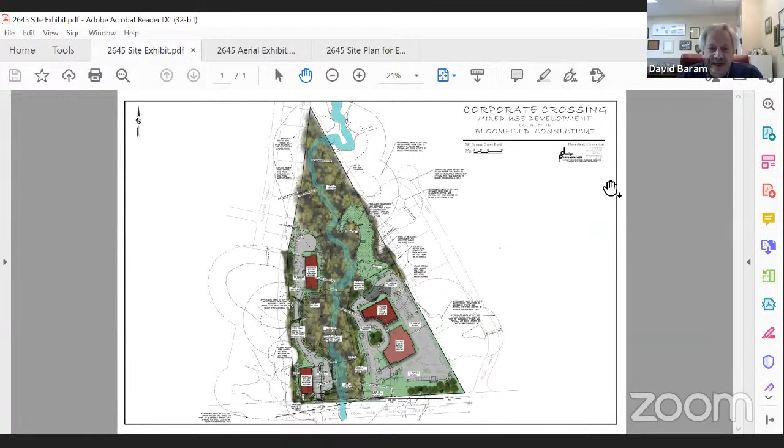One of those changes that I want to mention from the beginning is on page 13 of Peter's memorandum. Actually, page 12, he mentioned the idea of a conservation easement. And we were not sure at the last hearing whether we could accomplish that because there are some challenges, inasmuch as there's an MDC easement that traverses the property, and there may be another easement as well. But we went back and we took another look, and we are now confident that we can provide a conservation easement to encompass Filley Brook and the undeveloped portion of the parcel.

And we believe that will be about 8 acres, less any area that is comprised of the MDC easement or any other easements that we find, unless we can convince those parties to become part of the conservation easement. But should the commission approve this application this evening, we consent to a condition being a conservation easement, and I would hope that you would afford us some flexibility to work with staff to identify the boundaries of that easement and the language that is suitable to your staff. So we feel that will further enhance and protect, again, the undeveloped areas and the habitat and wetlands that traverse this site.

This is an exciting project for us and for those in staff and other groups that have viewed it. But as pertains to your commission, we believe that we have complied with your regulations and that we have adopted the most feasible and prudent assurances on this site so that we protect the wetlands, we protect the watercourse, and we protect the habitat. And in fact, when I address you at the end of the presentation to talk about the criteria for approval, we will emphasize again that our mitigation efforts are extraordinary and actually surpass the existing wetlands areas that are being impacted.

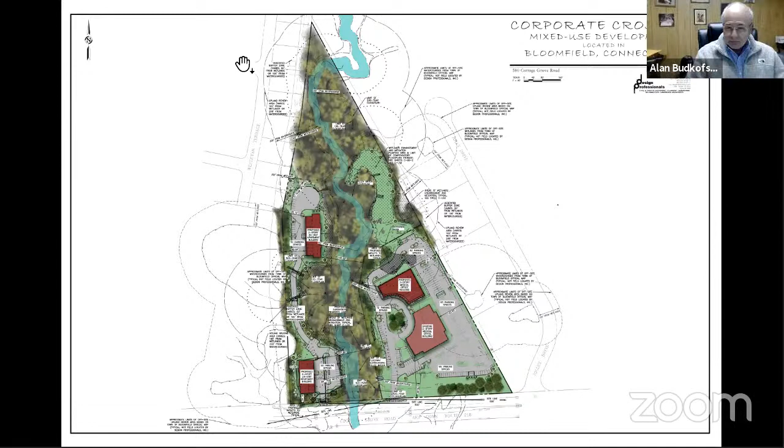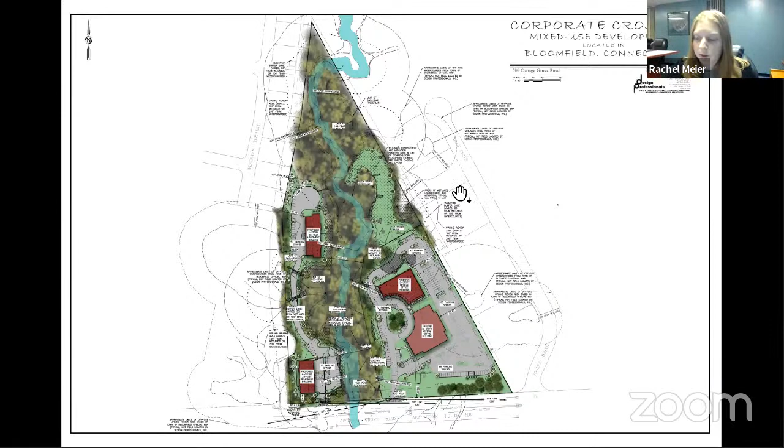Thank you, David. Good evening, Commission. Is everyone able to hear me well? Yep. Okay, great. So as David said, I just want to reiterate, my name is Rachel Meier, Senior Landscape Designer with Design Professionals. I wanted to provide a brief summary of the plan and letters that you received, as Peter Castaldi mentioned, since we last met in January, to accommodate the questions and concerns that we heard from you all. So what you see on the screen is our visual exhibit that we provided to orient you all again. But I will switch to a specific plan to highlight the areas where we have made changes.

So as a general overview, we have reduced 2,645 square feet of direct wetland impact, from over 16,600 square feet before to 13,980 square feet. That is a 15.9% reduction in the direct wetlands impacts. And that also provides related reductions to the upland review area disturbance and vegetated buffer disturbance. So these overall plans that you're looking at, on the left-hand side is the plan sheet that you saw back in January. And the right-hand side is what you should have received in February on our C-SP1 sheets, our overall site plans. So the right-hand side is what pertains directly to the revisions made since January.

So our main goal for the revision, as David mentioned, is to further reduce the effect of the development on the existing habitats on site, as well as Filley Brook itself. One area of concern last month was the residential portion of the site as it affects the wetlands, particularly the southern parking lot. Hopefully you can see my cursor highlighting the red clouded area on this part of the site.

So we removed 15 parking spaces, the entire row of parking spaces on the eastern side of that parking lot. This provided for an additional 18 feet of distance between the retaining wall that is required for grading purposes and Filley Brook itself. This change eliminated 1,292 square feet of direct wetlands impact. So you can see on the old plans, we were encroaching quite a bit and were able to completely remove this disturbance.

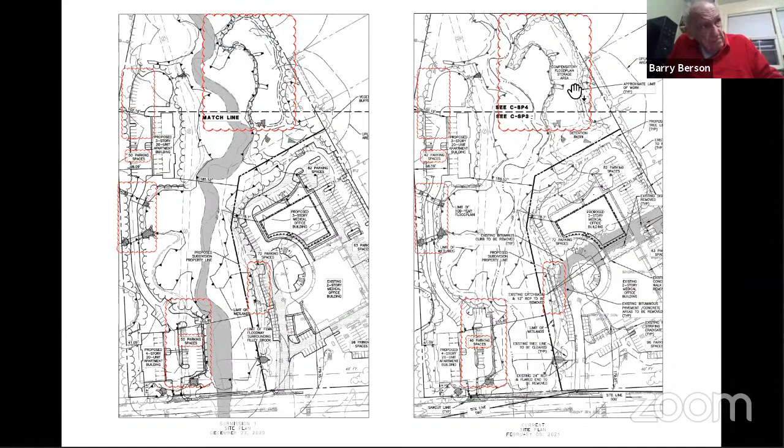So where you can see these two small pockets of wetlands, we were able to reduce the wetlands impacts in those areas, not completely eliminate it, to ensure that we still had proper water movement in the floodplain storage area. But those collective sites have reduced our wetlands impact, like I said, almost 16%.

So we would also like to acknowledge a note in Peter Castaldi's memo that we need to revise the grading in our floodplain compensatory storage area. So again, outlining this red clouded area in the northeast corner of the site to ensure that we do not have any 3-to-1 slopes in the side yard setback. We are happy to accommodate that as, again, a condition of approval working with town staff. We will provide revised grading plans to ensure that no steep slopes are impacting the side yard setbacks in this area.

As David mentioned, the applicant is absolutely willing to accommodate the conservation easement to run through the site. As mentioned, we have the sanitary sewer trunk line easement that runs through this site, but there is still a very significant amount of mature woodland that can be protected and preserved. There is another conservation easement to a property east of this that it will join with and provide a lot more continuity for habitat in the neighborhood overall.

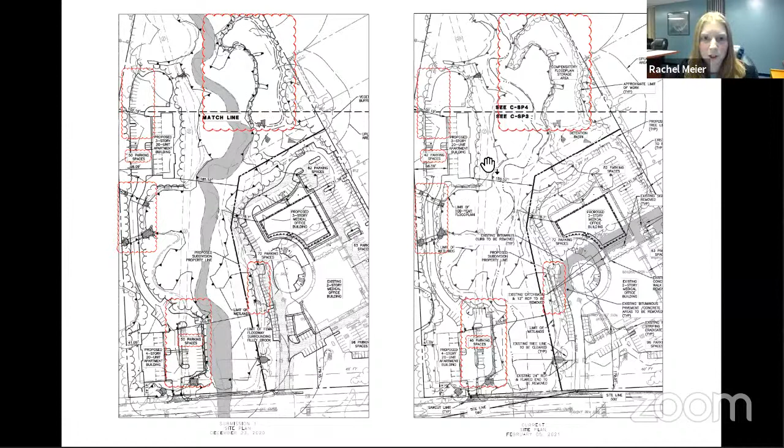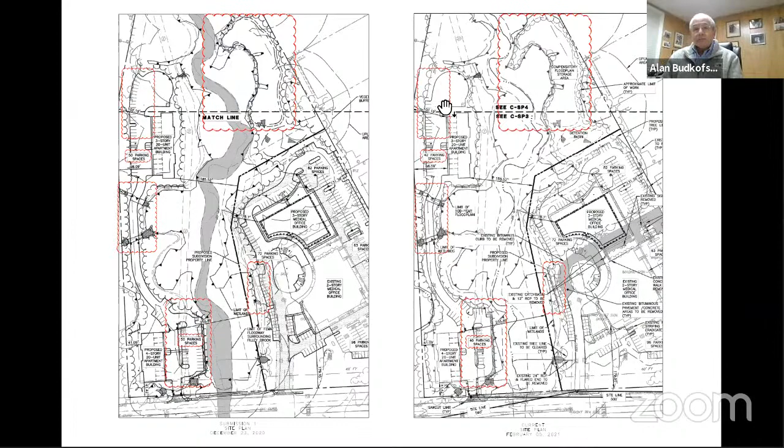Chairman, what I would like to do is talk about the criteria for considerations and just review with you some of the things that were done to look at feasible and prudent alternatives.

The first thing that I think you should recognize is that the new office building that we're proposing was actually approved in 1989, as indicated in Peter's memorandum. But the building that we're putting in now is much smaller in footprint and much less of an impact. And that was designed intentionally to avoid as much interruption and impact to the wetlands. So we did carefully plan that.

And I should say, as I mentioned last time, for 2 years, Peter Damali and myself and other members of the team have worked closely with your staff, and the various iterations of this plan have evolved dramatically so that we tried to design and place the improvements to the site in the less harmful areas and as suggested by your staff. But this office building is a great reduction from what we had before.

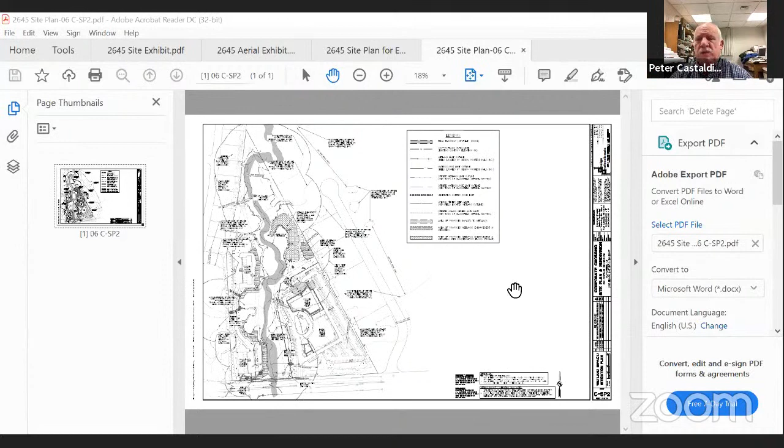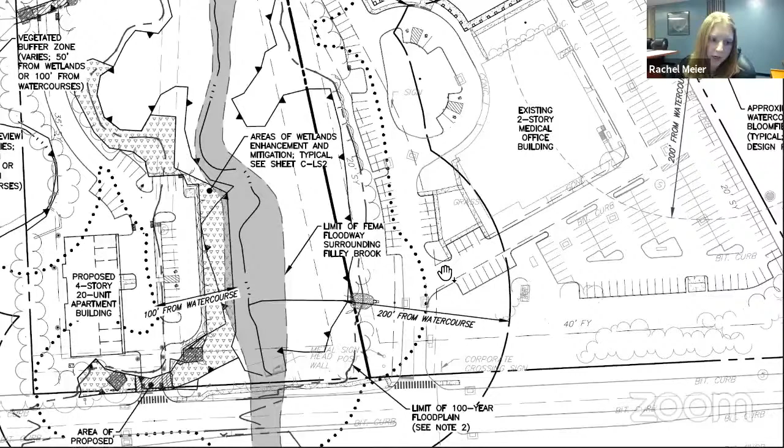Is that sheet SP2, CSP2? Correct. Okay. Can you make it a little larger, please? Absolutely. So I will zoom in close and start from the southern portion of the site and move northward, just to orient everybody where the existing medical office building is, on the southeastern corner over here. So you will see a diagonal dashed line is where we have direct wetlands impacts.

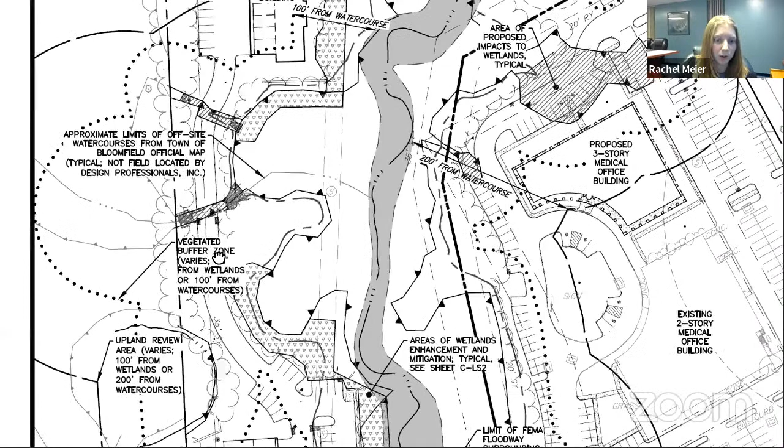So starting in the residential development on the western side, for those that were not here, 2 20-unit apartment buildings. We have 3 small pockets, 1, 2, and 3, particularly for pipe crossings to ensure that water moving from the west of the site is properly crossing underneath our new driveway entrance and entering the wetlands through some water quality units. Sticking to the residential side, just to provide some clarity, moving north through our entrance drive that accesses both of the apartment buildings. We have some more wetlands disturbance here.

Our wetlands agent has described these 2 areas as eroded ditches over time that water has continued to flow through. So we are channelizing those underneath our access drive. Again, these will have water quality units and will be improving the quality of the water that is moving from west to east, as it will contain a lot more of the sedimentation that was coming in from the farmland before.

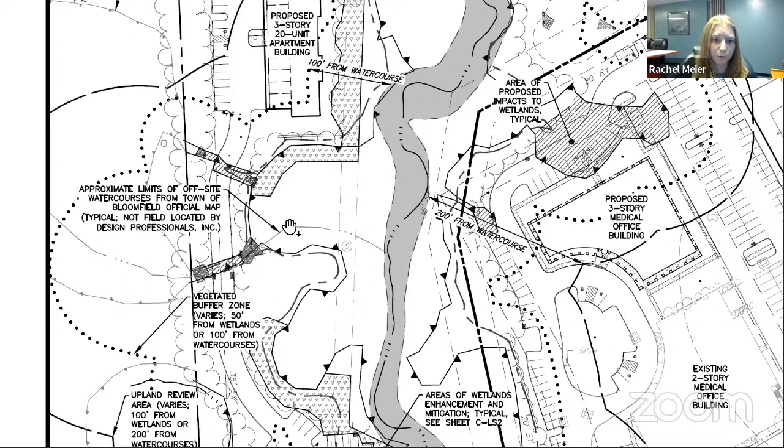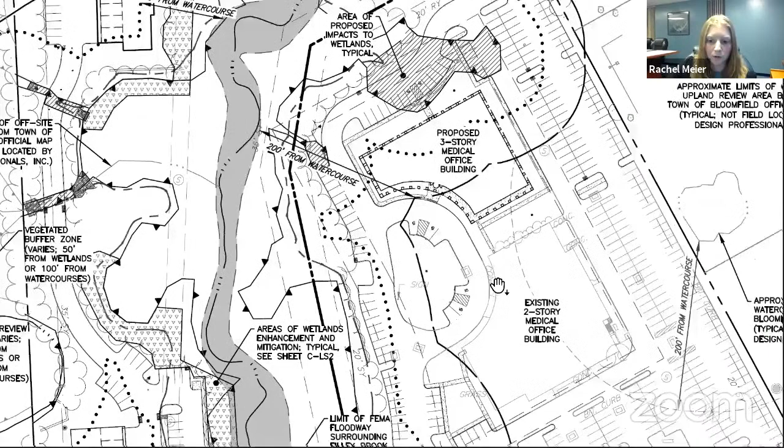So that is it for the residential side. Again, where we were discussing earlier, we used to have some in the north, but we no longer do. So we will move back over to the office side of the development, which is east of Filley Brook.

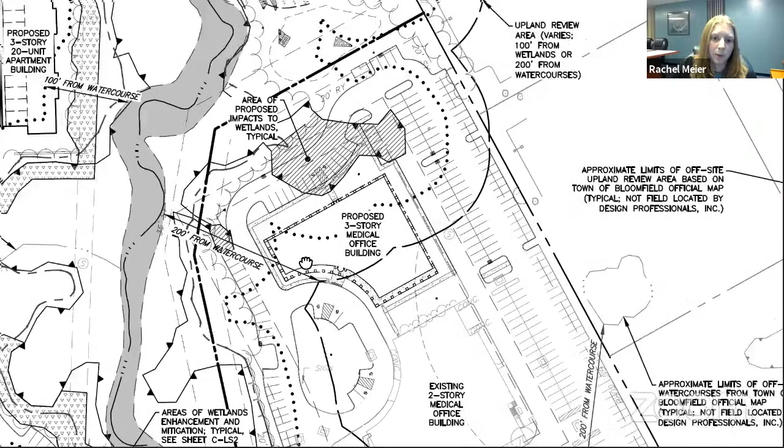So the largest portion of wetlands impacts on this site is this large pocket here. It's a little over 9,000 square feet of disturbance, which is the majority of the proposed disturbance now, the almost 14,000. So it's over half. There is a small impact here due to parking and grading. And then, as mentioned, there is some disturbance to the small wetland fingers that peak our floodplain compensatory storage and wetland mitigation area. There is a large pocket to the east here that we have completely protected.

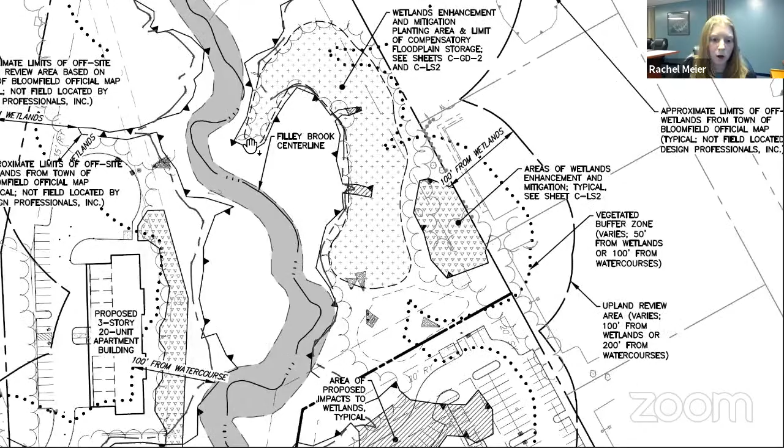And to note, all of the areas on this plan, which is again sheet C-SP2, these triangles are wetlands enhancement areas that run all along our limit of disturbance along the wetlands to provide invasive clearing and more native vegetation plantings.

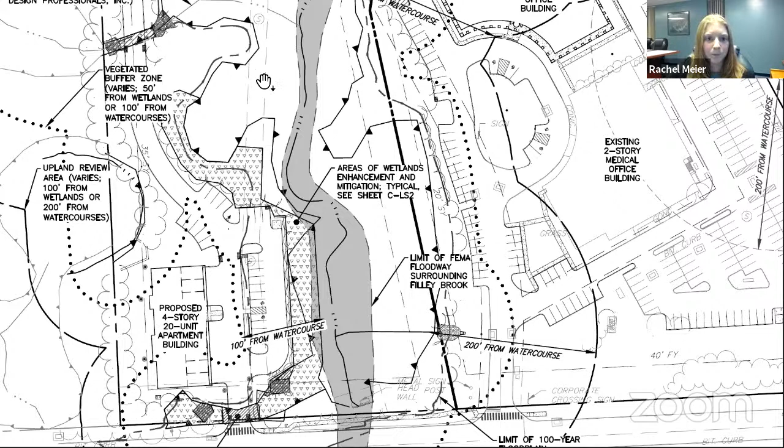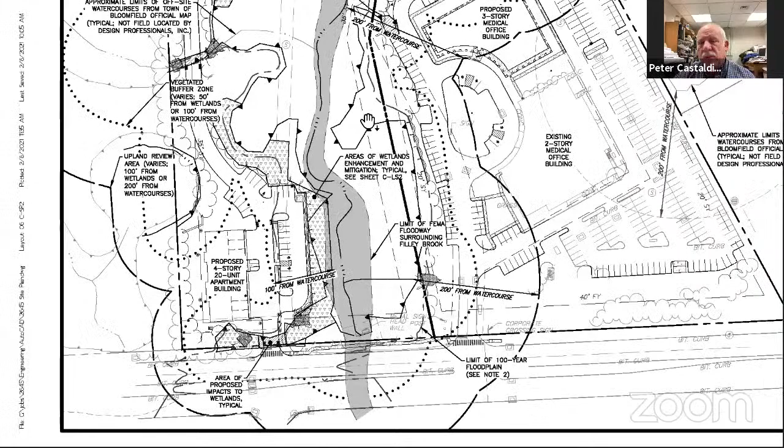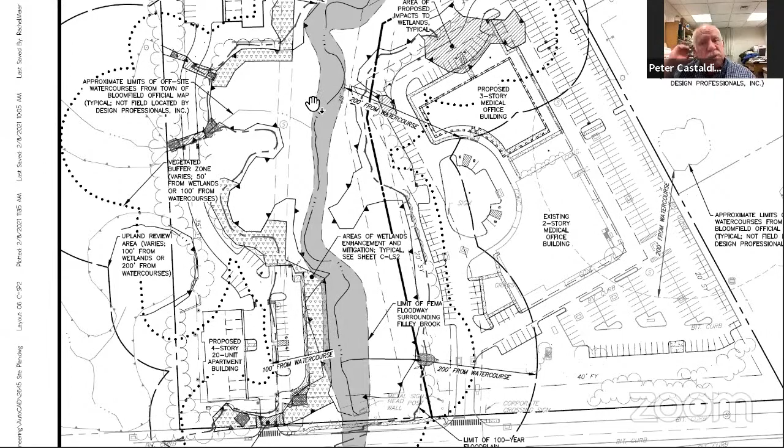Yeah, I would add that the flow in the water course is from north to south. And the big shaded area on the plan is the floodway, not the FEMA flood zone, but that's the floodway. And because there's some impacts to the floodway and the flood zone, they have to do this flood compensation area. And except for the two little fingers, as you mentioned, this area is going to be in the upland review area. It's not a wetland impact, but it's an upland review area impact.

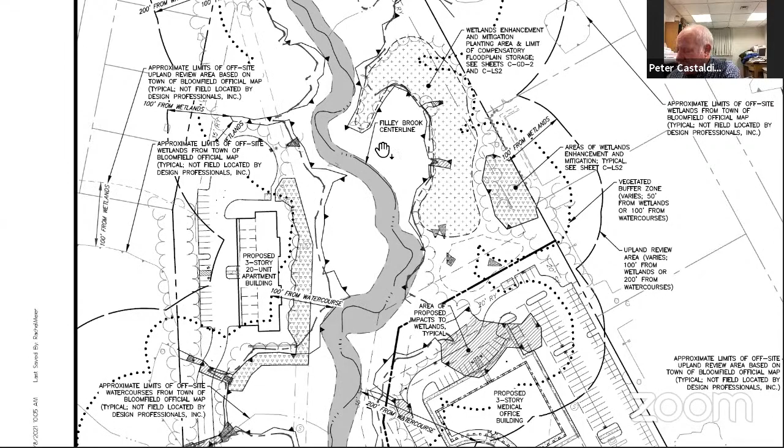Okay, I just wanted to make sure that everybody was clear as to what the actual impacts are. And I think that the applicant has done a pretty good job of addressing the requirements of the regulations, as well as addressing most of the questions that were brought up by the commission and by my staff report. I did see that there was an offer for a conservation easement, which I think is a good idea.

There is an existing one on part of Filley Brook to the northeast, and property to the northeast, and if that's something that the commission would consider accepting, they can accept the conservation easement or request a conservation restriction, which is a little bit different than an easement. But typically, if we do accept a conservation easement, we ask that the easement corners be marked in the field and that there be some kind of warning you're walking into a conservation easement sign or signs erected.

I think the language in that standard comment would be every 100 to 200 feet or every 200 to 300 feet and at likely points of entrance. So I think the conservation easement is a good idea. And I would recommend that the commission add a condition of approval that outlines the requirements for marking the thing in the field, both with corner pins and warning signs.

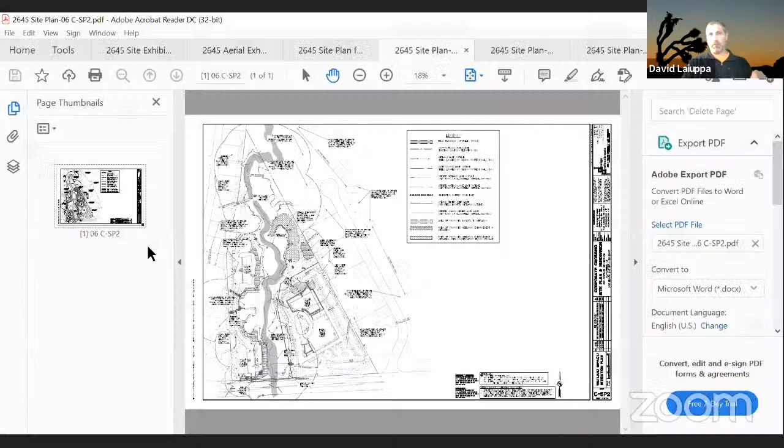No problem. Yeah, what I was going to say is that there are some along the easterly part of the property, but those regulated activities within 500 feet are also within 200 feet of the brook on the other side. Right, but the 500-foot habitat zone is a regulated resource as opposed to our upland review area, which is viewed in a different way, I guess, that it's an upland review area versus an actual resource. So my thought is that if there's activities within the regulated resource, then that should be figured into the impact calculations.

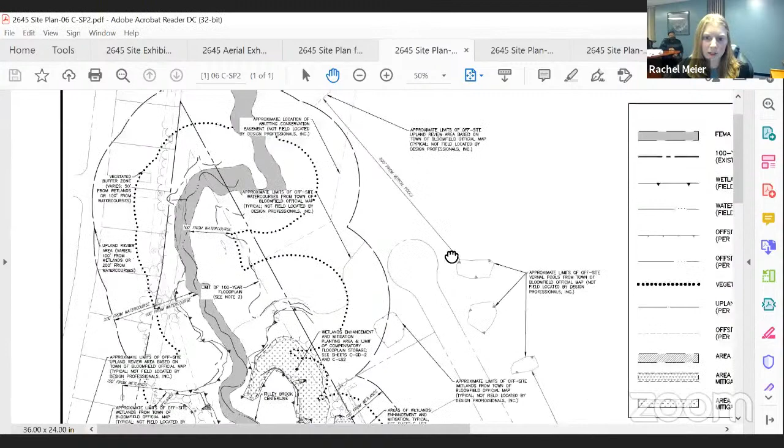So we can clarify. So these are the vernal pools to the east of Jolly Drive. There are 3. There is an additional one that is further north of the site that does not reach our impacted area. I believe the 500-foot offset would reach into this portion. However, as we stated, this area here is our floodplain compensatory storage area. From the property line to the west is all sloping down. We have graded everything to capture any stormwater that falls on our site, and our professional engineer is here as well. He can definitely go into that in a bit more detail, but all of the impacts in this area will not leave our site towards the vernal pools on the eastern side.

Right, well, you're just talking about site drainage, though. The 500-foot habitat area is identified as a critical habitat. So there's potential that there are nesting and feeding areas within that 500-foot buffer. So I guess my point is that ground disturbing activities within that zone is an impact to the regulated resource. So the vernal pool itself is just the envelope. The 500-foot area around the vernal pool is the habitat area, which is covered under our wetland regulations.

Understood. And maybe I can clarify a little bit better. I apologize if I was not clear off the forefront. This area will also act as our wetlands mitigation. So any of the vegetation removal required to construct the compensatory storage will be replanted with native water-friendly species. This is I believe over 20,000 square feet of area, and will be included in that conservation easement area as Peter's memo requires or defines, to include the mitigation and enhancement areas. So that will be able to re-enter a native vegetative state over time. So any temporary impacts by clearing the vegetation will be rewilded over time and return to, as we've said, an enhanced native environment compared to the vegetation that exists there now.

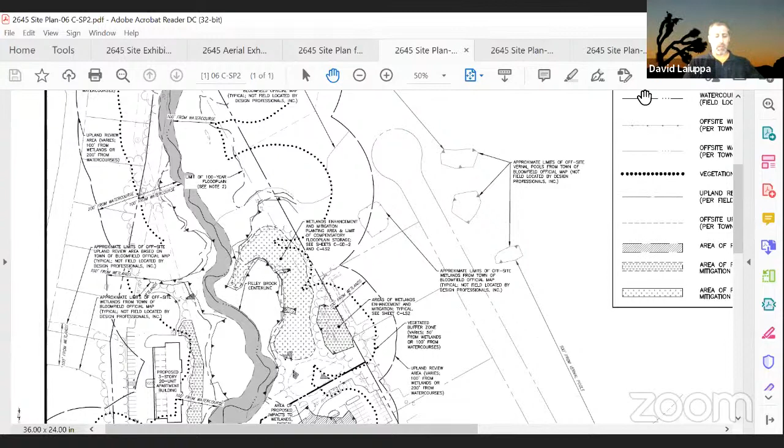Peter, in a previous application, I thought we had a vernal pool that was identified also just north of Cottage Grove Road. That was a very recent application. It's not shown on the map though. It's just on the north side of Cottage Grove Road, next to the adjacent property.

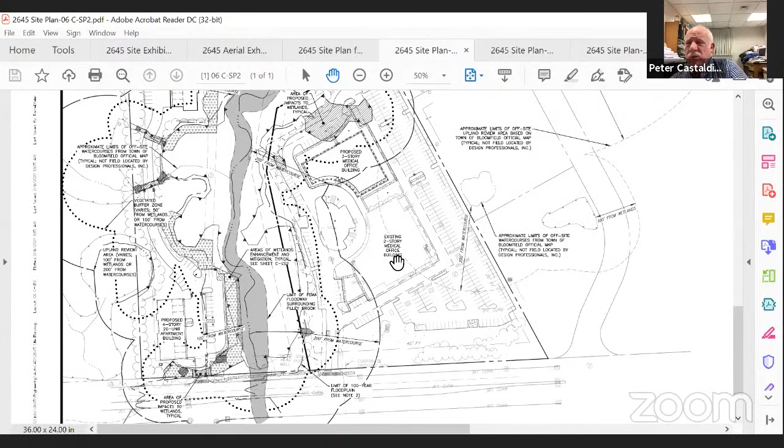Just keep scrolling down. So if you move the hand down to the right, all the way to the right. Yeah, right down and to the left a little bit. Just a little more, right there. Didn't we recently have an application for that existing building to do some work, and I thought there was a vernal pool that had been identified there. I think it's on the other side of the road from where the hand was at 10 Jolly Drive.

No, I think he's meaning even further to the east. That was last year or maybe the year before. Oh, yes. Sorry. Yeah, and that work is already done, right? Yeah, you're right. That was right next to the railroad tracks. Yep. Okay, so that was further east. So that would be probably pretty far, on the north side of the road and west of the tracks. Right there, yeah.

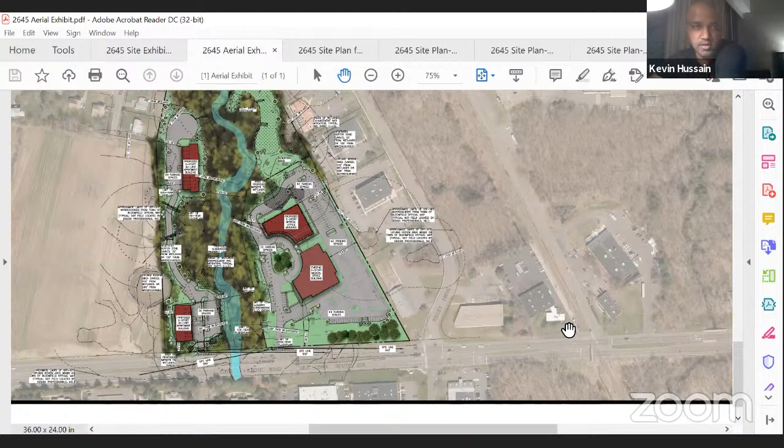In the meantime, as we're bringing in Mr. McCann, Rachel mentioned only a compensatory area, but based on David's question, that 500 offset would even pass that compensatory area into the paved parking area too. David, would that be a concern for you too, not only the area they've highlighted but including the paved area, correct? Right, and I don't know exactly where the radius is, but any ground disturbing activity within that 500 foot, whether it's to make it more natural or to make it paved, is an impact to the habitat area.

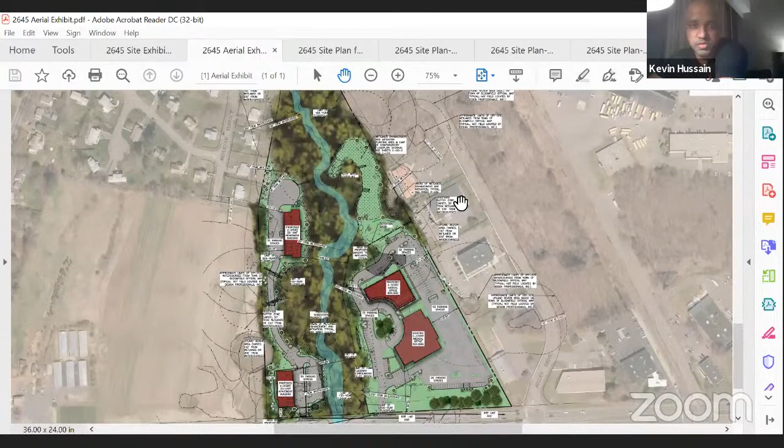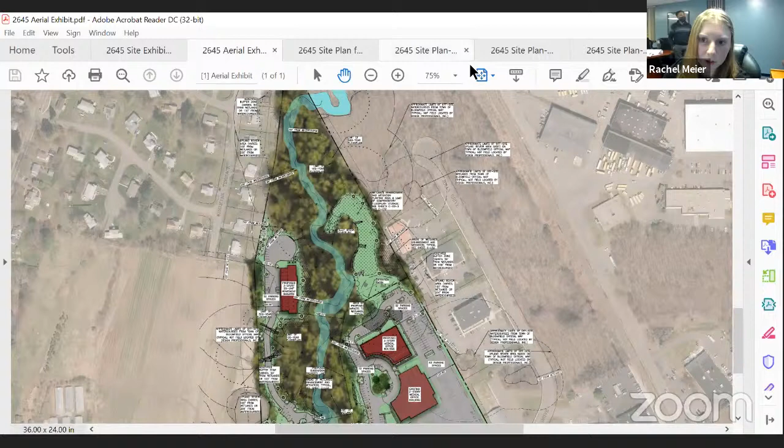What is that radius you have right now there, Rachel, if you just zoom in right here? So I will clarify. Sorry, hold on, Peter. This old exhibit does not include these vernal pools. So let me get you back to this plan, I think it shows it a little bit better. So what we have provided is 100 feet from the wetlands and 200 feet from the water courses for the upland review area. That includes all of the site located wetlands and water courses. This small dashed line is the 500-foot buffer for off-site vernal pools. So those three over here, which will collectively hit our property line. We did not incorporate them into ours.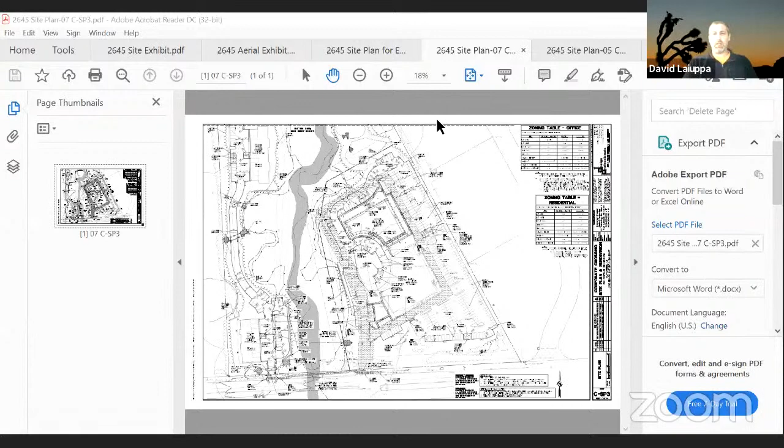I don't think we're seeing what you're pointing at. Right. So once we created the 500-foot offset from the vernal pools, it was incorporated into all of the other upland review area limits. Can you put it back to the plans? We can't see what you're talking about. At least I can't. I'm sorry. Did this jump screens? I apologize. Yeah, we're seeing the site plan. How's that? That's better. Thank you. Sorry, that was a little technical glitch.

So I'll just rewind. This light dashed line is the offsite wetlands and vernal pools boundary. That's the upland review area from those. So they were incorporated together. We worked with Peter Castaldi to show that correctly by incorporating them. So it's hard to tell exactly where the 500-foot is by itself, but you can see that there are upland review areas from offsite features that reach pretty far into even where the existing site is now.

No, but what I'm saying, if you look at your 100-foot offset, it's probably just about 125% of the width of Jolly Drive, right? I'm just approximating right now. And if you do that with the vernal pools, it will be within the 500 feet, but not within the 100-foot, David, right? You're concerned of anything within 500.

Right, because like I said earlier, the 500-foot area around a vernal pool is not the same as an upland review area. The upland review area itself is not a regulated resource. It's a review area around a regulated resource. But the 500-foot area around a vernal pool is a regulated resource. So if you equate it to a wetland, the 500 feet around the vernal pool would be like your wetland boundary, basically. So it's not just the pocket of the wetland, it's the habitat area around it, as defined in our wetland regulations.

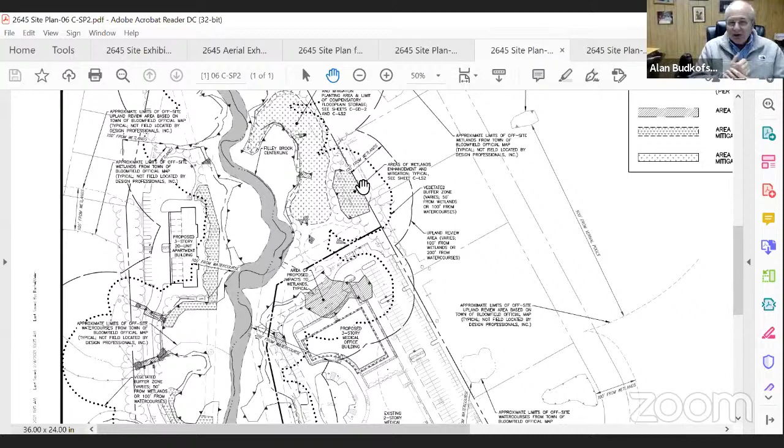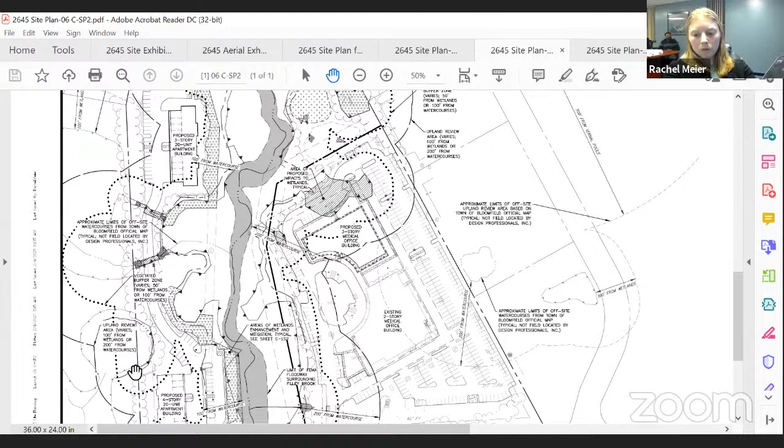Okay, so the Filley Brook riparian zone has 4 principal functions, essentially groundwater recharge discharge. The floodplain itself had the sediment toxin retention, nutrient removal, and then we had obviously wildlife habitat. Wetland 2 was the off-site pond. Hang on a second. Dropped it. Yeah, it's the man-made pond, which we only hit the very eastern edge of, and most of the pond is off-site. And we're not doing anything to that forested buffered side of the pond.

And then the last one is what I call wetland 3 in my report, the disturbed little isolated pocket up by the eastern property line that we're going to enhance and make a lot better than what it is now, which had fill piles and invasive species and all kinds of other nonsense. Okay. I just had one more question and I'll pass it on. Principal function, which was the recharge discharge. And there were a few functions that were there, but not principal, with wetland 2 with the pond. And then wetland 3 really didn't have anything at all.

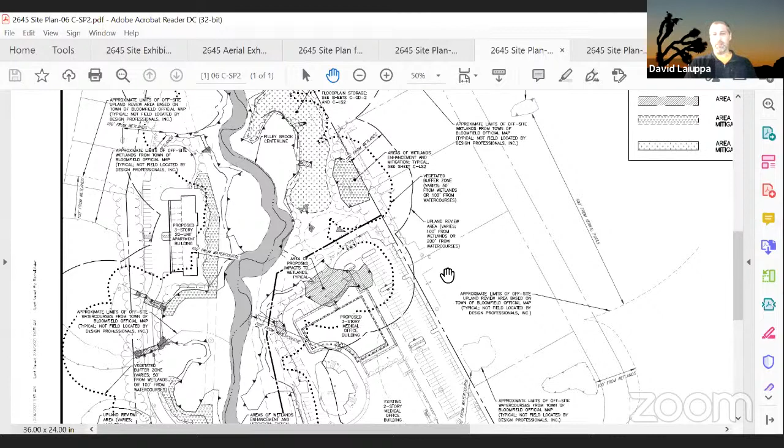Okay. All right. So my last question had to do with the vegetative buffers. I know trees are going to be taken down. Obviously, these are more mature than what will be replaced. Can someone talk in a little more detail about the impacts to the existing vegetation and the proposed replacement for those impacts? I'm still sort of harping on this being a riparian corridor and the loss of functionality, for lack of better words, of the mature to semi-mature forest versus newly planted vegetation.

Well, I'll take some of that and I'll let Rachel take over if she needs to. In my report the other day, if you recall, I talked a little bit about why I got back into the aerial photos back to the 30s, and then I actually have a couple of figures showing the site in the 1970s and then again in 1990, showing the site either deforested or the majority of it deforested, and actually the whole area to the east and to the west was deforested as well. And then we have a sewer line, which I'm sure at the time it went in, they deforested it. Oh, there we go.

So this site has been disturbed or deforested on more than one occasion for many years. So what we're doing now is nothing new to this site, and we are going to be replacing things that are being removed. Because most of the understory, I got to be honest, is invasive. Except for the tree canopy, everything else is invasive, with a few spice bushes and a few other wildlife shrubs that we like. Everything else is horrible. So we are going to be replacing it. And yes, it's not going to grow to a semi-mature forest overnight, but it will get there.

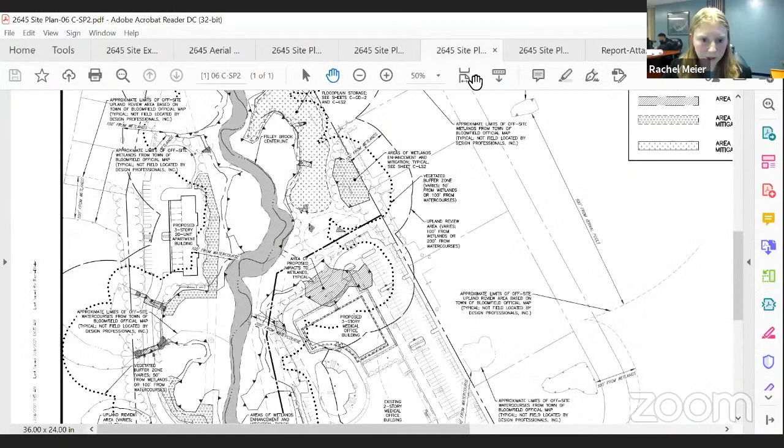Just for clarification, the wetland enhancements are exactly enhancements. There's no creation of new wetlands, correct? So in the areas that we are calling enhancement, it is just enhancement. Sorry, I can try to bring you back. This entire area with the plus sign cross hatching is wetlands creation. So it is a dual purpose area, over 20,000 square feet, which is part of the 1.5 to 1 mitigation area. We'll have wetland seed mixes as well as associated shrubs and mature trees that can take a variety of water inundation at different levels.

We will have 2 seed mixes. So there is a flatter shelf area, which you are able to see better on the landscape plans that you were provided in print. The flat shelf will have one type of seed mix and the side slopes will have a different type. That's fine. Peter, do we need to say enhancements is fine on your behalf, or do you think we should also say any sort of creation?

Yeah, that compensation area will be a created wetland. I did have one other possibility for additional enhancement, but they're providing not just mitigation as created wetlands, they're also providing the enhancement around the rest of the wetlands, these other areas that she's pointing out now.

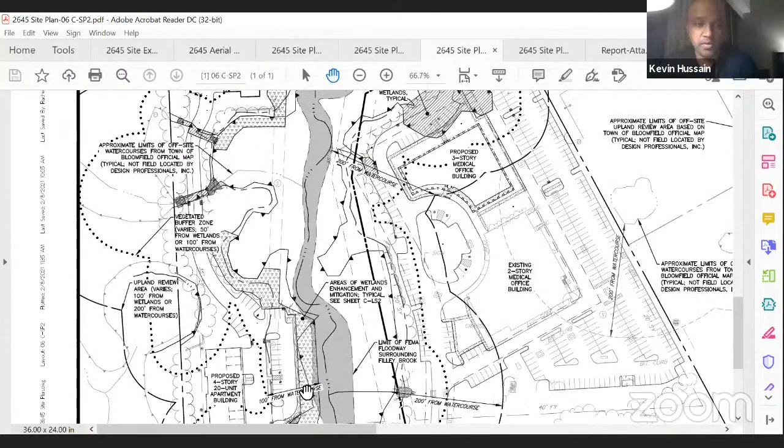I'm fine with that, but I guess for the public, we know what enhancements are, and I just want to be able to see if we need to separate creation, which is new, versus enhancing what's existed. I'm just going to leave that to you to make that decision. I'm fine with it the way it is. I understand what's going on, but I don't know for public records if we need to separate it for any legal discussion. I'll just leave it at that. Okay.

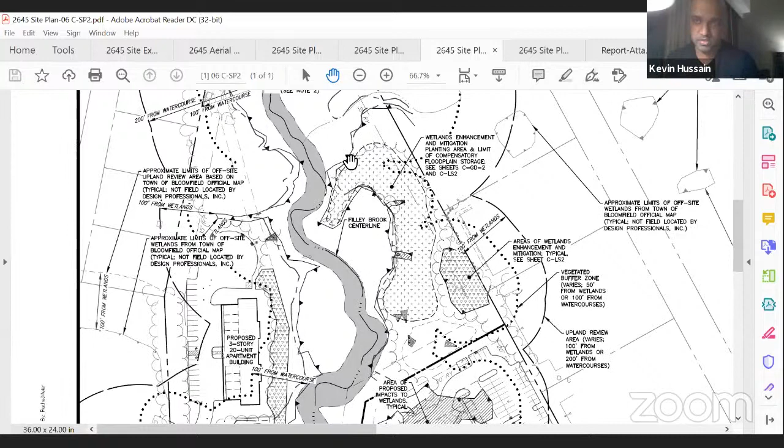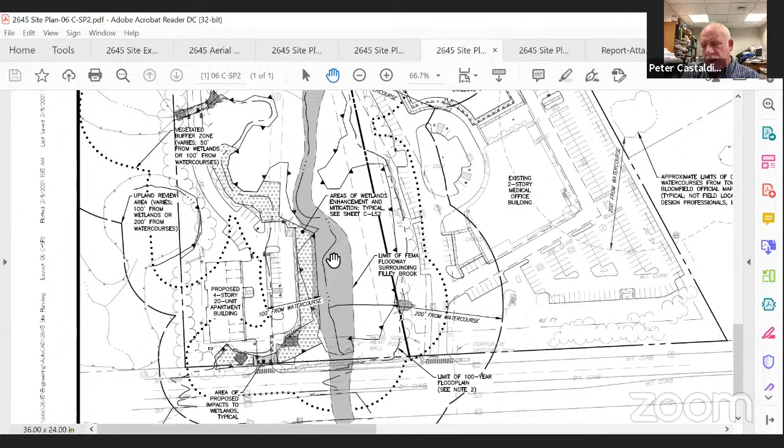Their overall mitigation for the wetland impacts includes this area of created wetlands and the mitigation areas at the little pocket wetlands just to the southeast there, and on the other side of the brook along the limits of clearing. And there may be other opportunities, but that created wetland and the enhanced wetland edge both count toward the mitigation. So there's two parts. There's an enhanced wetland with vegetated buffer plantings, and the enhancement they want to do to the isolated wetlands. Then the compensation area is new or created wetlands.

Right. I just want to clarify again on the application for the permit, part 13 says areas of wetlands created, enhanced, or restored. I just wanted to delineate the three, if we can, in the plans to see what actually was created, what was enhanced and or restored, just for clarity. We can. Absolutely. We're happy to work with the town staff as well, like Peter said, to explore any additional opportunities he sees for mitigation, creation, or enhancement, whatever he sees fit.

And a couple other minor questions. Number two, and I'm sorry I missed the last meeting, so I don't know if this was covered or not. Any endangered species database that you look at for DEP within the wetlands and or the areas there? We do not have any of the Natural Diversity Database areas on the site. Okay, great. I agree with Peter and David that we should look into the conservation easement some more.

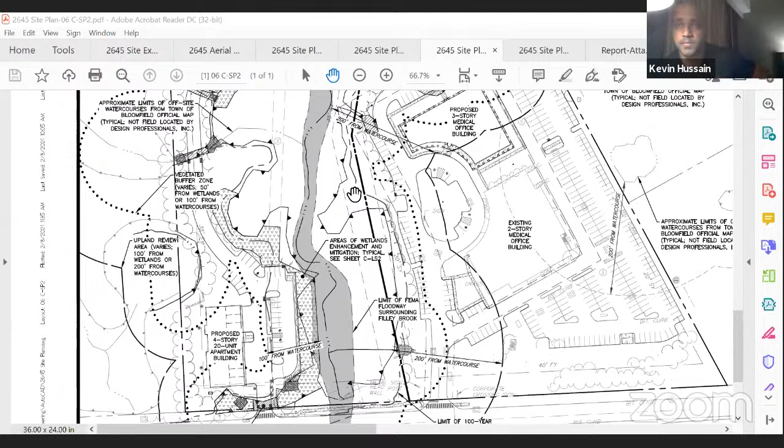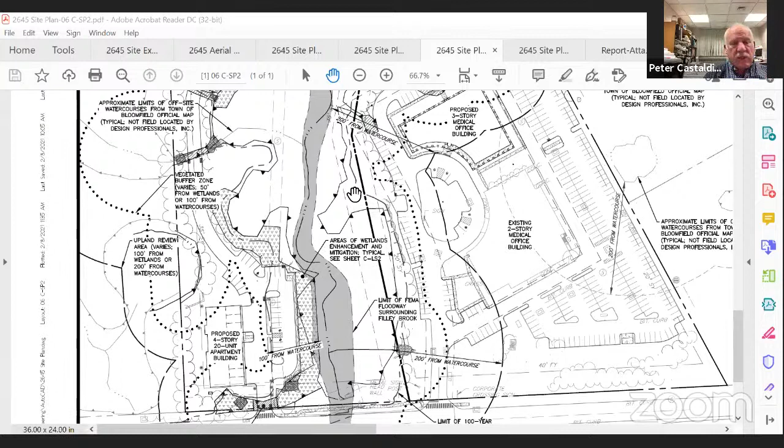But Peter, I don't think we need anything about that, right? We don't what? Sorry, say again? We don't need to have anything from MDC giving us the green light for them to have that retaining wall that close to that easement and that sewer, right? Correct. Okay. Rachel, can you show us sheet C UT1, utility plan? It's number 13. Absolutely. I'm going to stop sharing just for a minute. That one shows, I think, the clearest picture of where the sanitary sewer is.

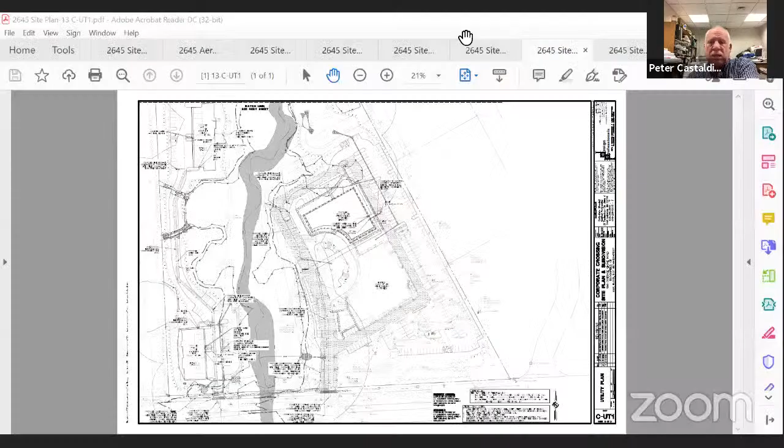And it is between the building and the proposed retaining wall. The distance, I'm not exactly sure, but it's the southerly apartment building. The sanitary sewer is running through the parking lot. This is heading east. There's an aisle, and then there's the retaining wall. So they're quite a distance away. Right. Yeah, you got to zoom way in to see the easement.

No, I see it, but I wasn't sure if you were talking about an elevation view of where the wall is and the size of the pipe. I understand this. I can see this. Peter, I thought there was an elevation view of the retaining wall, like a cut sheet. But that's fine. Okay, I'm good with that.

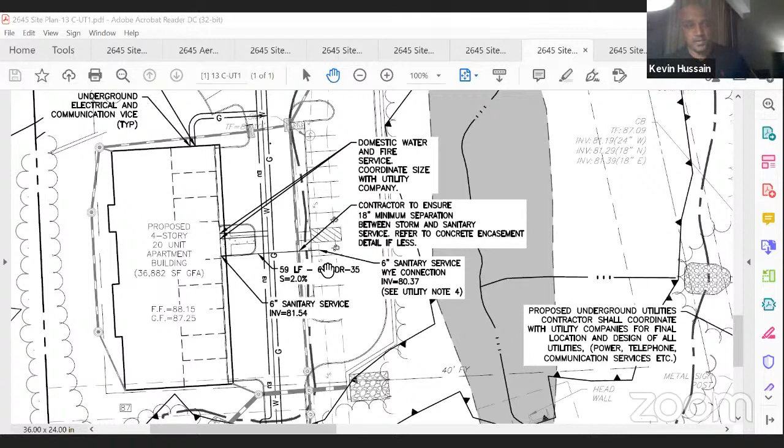And then the last thing, and I think Peter, you mentioned it, I think the application stays with the permittee. In this case, it's Corporate Crossing. If there's a sale before or after, I think they'll be held responsible.

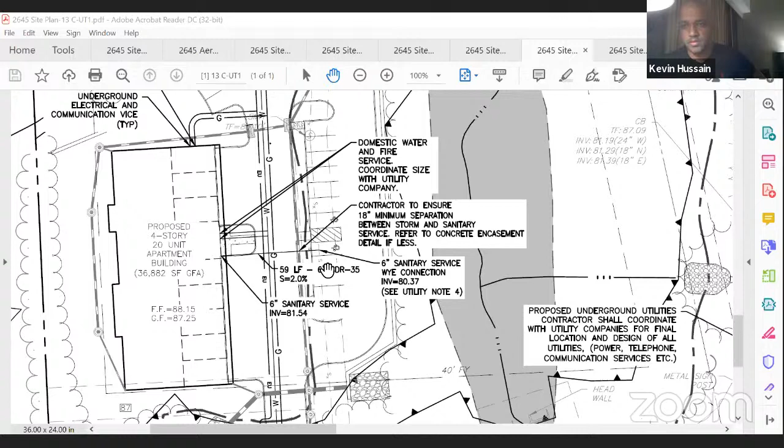And then at that point, either they or the new, I don't know, whoever buys it will then submit a new application. I think we have to hold the current permittee until we figure out what's going on before or after sale. Yes, that's all. The wetlands regulations say that the permittee has to make a request for a transfer of the permit.

So the permittee holds the entire permit, and if they transfer it to another entity, that transfer has to be done with a letter in writing requesting the transfer, and because this is a commission permit, that would come to you guys for an approval vote for the new permittee.

The problem is if parts of the project are sold, then it gets difficult. But I think at this point, they're not asking for a separable permit. They want a permit for the whole project. If and when things get sold, we're going to have to deal with it then.

Right, but what I'm saying is that we're providing the permit, tonight or whenever we vote, to Corporate Crossing, and that should stay with Corporate Crossing, and even if they sell a part of the property, it still stays with them. And then at that point, either they or the new owner submits a new application, or however you want to word it. Yeah. Someone has to be responsible. That's the way it'll go.

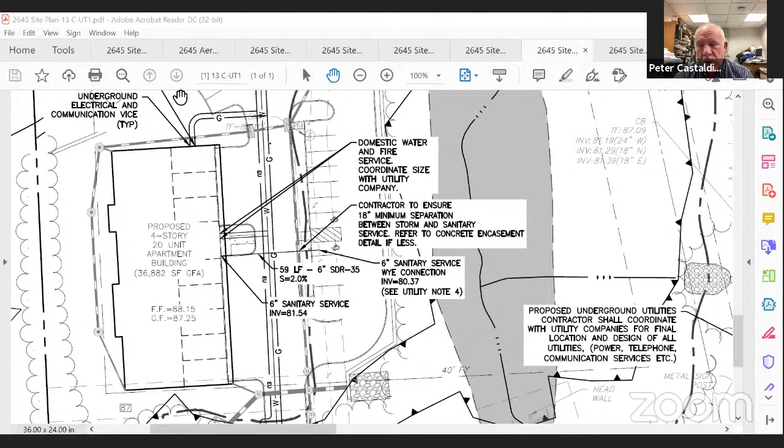You're right, but I caution you that it would not necessarily be a new application. It would be a request for a permit transfer. Correct. Right. I stand corrected. Thank you. That's all I have. Okay, any other questions? Okay, I have a couple questions.

Where do you plan to push the snow to? On both sides? Do you have designated areas where you wanted to stockpile the snow? I believe that one of the areas would be the cul-de-sac area, which is a larger area, if need be. Rachel, I don't know if you've... Oh, in the office building, you were gonna push it into the corner. I think I asked that last time.

Yeah. All right. If you prefer that we designate specific areas on our plans, we're happy to outline some for you just to ensure that traffic is still able to maneuver in the winter. Yeah, if you could just mark it somewhere. I don't want you pushing into the wetlands or a spot where it's gonna run off. Absolutely. Staff can get it.

I do have a problem with the subdivision. My understanding is that we cannot subdivide a parcel that is landlocked. And since you don't have access, that's what we would be doing. I think it would work better if you withdrew the subdivision portion of the request now. Wait till your approvals and your state curb cut is approved, and then it's a simple application to subdivide it.

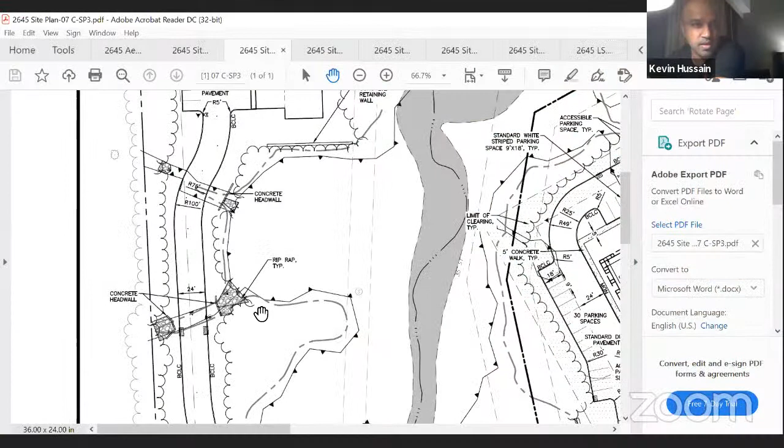He's muted. Thank you. Sorry, Rachel, on your site plan, the one you pulled up earlier showing the entire site, there were 2 areas where you put in riprap in the wetlands for the storm flow from the west to the east, underneath the new roadway. This was the eroded channels, right, along the west side. Yeah. Right. What size pipes? I forgot. Are there pipes there?

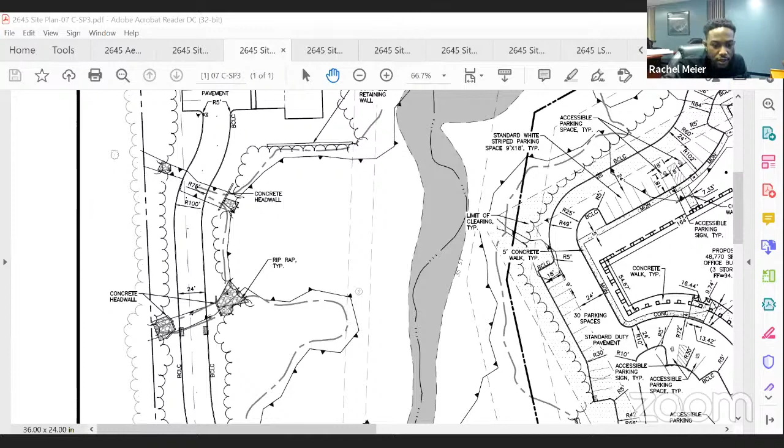There are pipes. I'm letting Daniel Jameson sit back down; he has that information. Hello again, members of the commission. Hey, Daniel. What size are your pipes there again? Good. I am going to pull up our drainage plan where we can see these pipes. I did want to clarify something. Last time I said this one was a 12, but this is actually a 15-inch pipe. So we have a 15-inch crossing with a head wall on the west side and another head wall on the east side. This is basically just allowing the existing flow path to continue underneath our road.

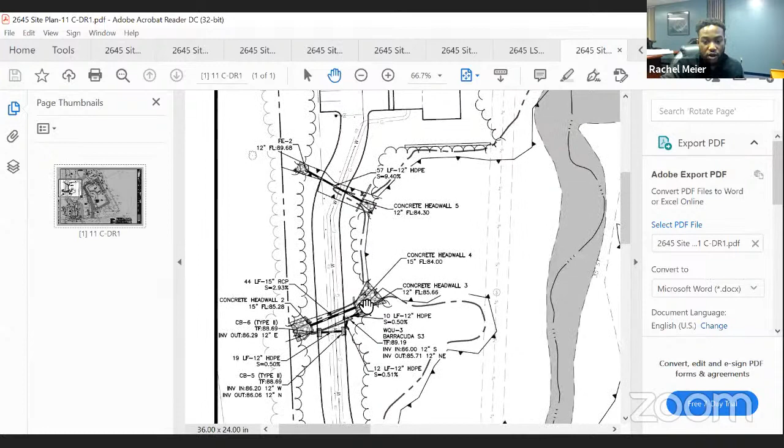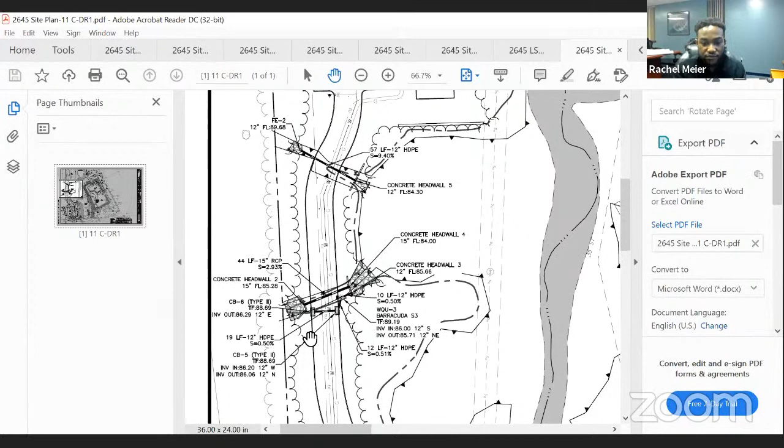As Jim McManus said and Peter alluded to, the current channel is incised and is eroding because of its incised nature. So we will be armoring the inlet and the outlet of this crossing to prevent that erosion from continuing to occur, basically fixing the incised state of this channel and allowing the water to cross our road in a protected way.

Now, part of the erosion could also be that we've had higher intensity storms. We've had a lot of 100-year storms recently. Is that 12-inch pipe going to be able to take a 100-year storm? Well, regulation says we design the pipe crossings for the 25-year storm, which we have, and we use the NOAA Atlas 14 rainfall data, a database that updates the 2-year, 10-year, 25, 50-year, and 100-year storm rainfall depth amounts based on the rain that's happening.

So we use that data to size it, which speaks to more water than what the Connecticut DOT's drainage manual speaks to. So we did size the pipes for the 25-year storms as required by regulation. That's fine. Again, I still feel like we've had a lot more 100-year storms in the last 5 years because of global warming, or whatever you want to call it. But just make sure any overtop doesn't pick up sediment from the roadways and bring it into the brook or the wetlands.

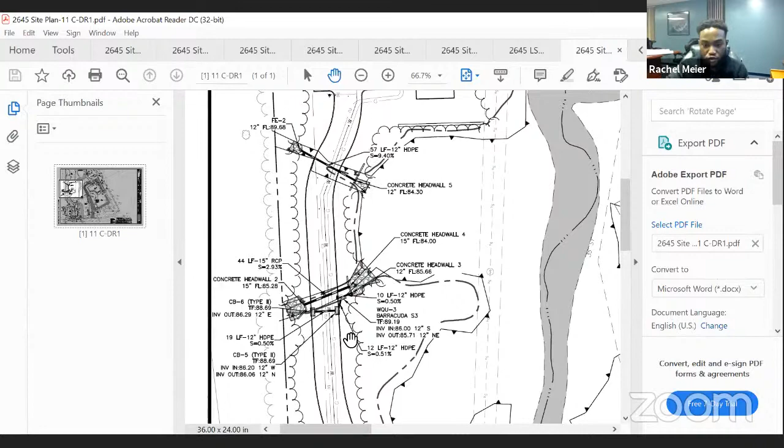But even if it didn't, as all bodies of water work, it'll pool up a little bit. I can't say for certain that it wouldn't overtop the road here, but if it did, this is a low spot. The catch basins there are the low spot along this whole entire strip here. So if it was to be a flooded issue, in a 100-year storm, this whole floodplain area, now with our compensatory storage area providing the volume that we're taking away from here, would fill up.

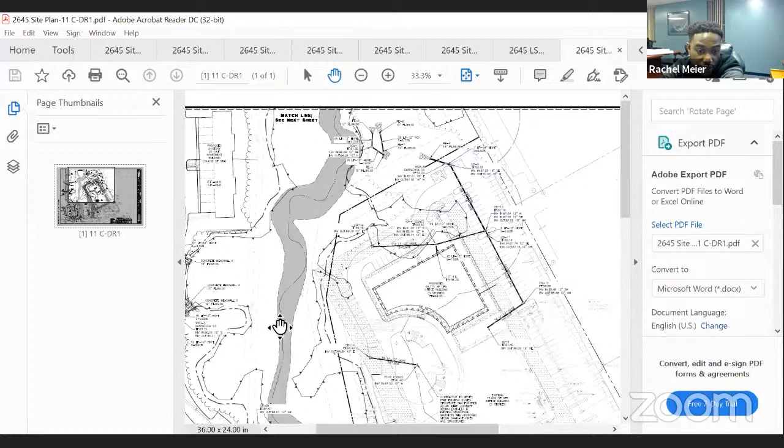So if there was a flood, the buildings and the main places where people will be are safe from that flooded area. And at worst case scenario, this area would be flooded for the duration of that peak intensity of the 100-year storm. And then as the water recedes, this area would drain out and get back to original conditions. So I feel the way that our grading plan... No, I'm not too worried about that, I appreciate that.

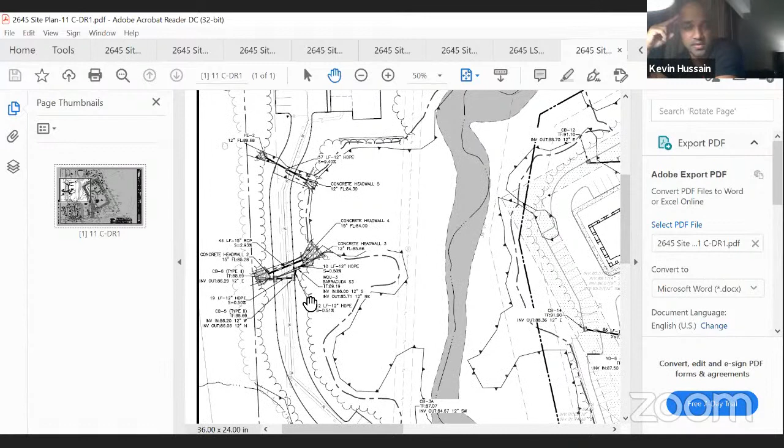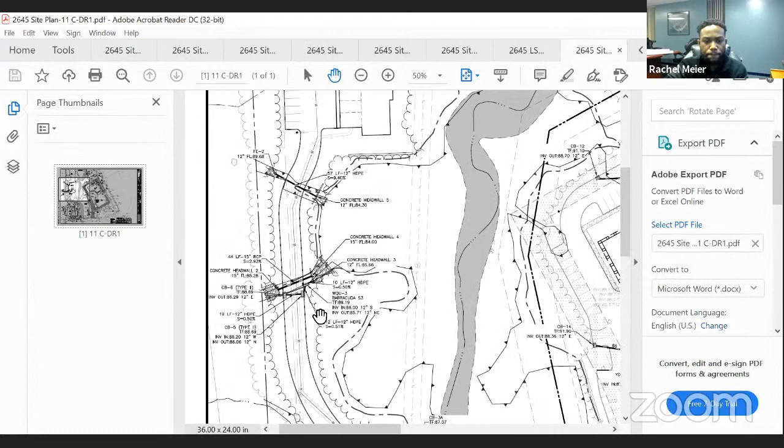I'm not worried about the people. I'm just worried about the wetlands. I just want to make sure there's nothing that would affect the wetlands in terms of maybe oil slicks or anything that would get into the wetlands. But just take a peek at your 100-year flow, just out of curiosity to see what it is. 10-4. That's all I have. We can provide that. Thanks. No problem. All right.

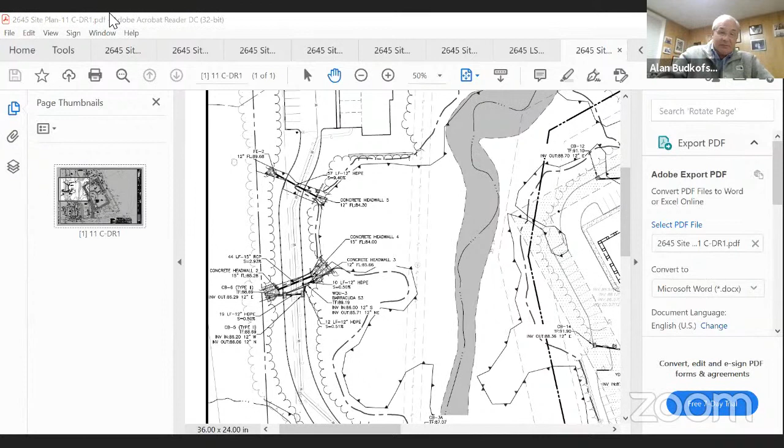Any other questions? All right. Any comments from the public? All right. Any last words from the applicant? I do believe we lost David Barham, unfortunately, but I just wanted to thank you all for your time and patience as we work through your questions. We appreciate your consideration tonight. We are happy to work with town staff, as noted, to work through any of the potential approval conditions you see fit. All righty. Nice job, Rachel.

Any comments from the commission? Yeah, I do have a comment. I just wanted to go on record saying that based on the application, presentation and response to questions, I don't feel that the applicant has adequately addressed the impacts to regulated resources, because the 500-foot buffer around the vernal pools is a regulated resource. And unless there's a scientific study that shows that resource doesn't exist on the site, I don't think that it was adequately addressed in the presentation. So that's all.

David, did you hear that? You're muted, David. My apologies, my computer crashed and I had to reboot the whole thing. Tell me about it. I got the same problems.

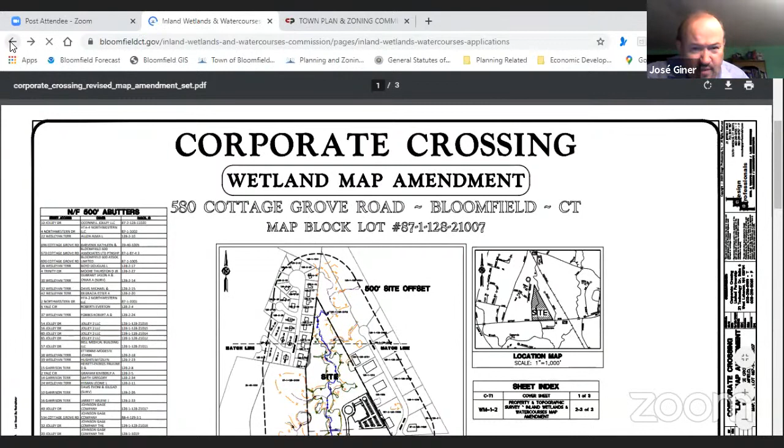You click on that, and in about 20 minutes after it reloads, every single application has everything that Peter sends out in the packet. So the application for Corporate Crossing has the application, owner's authorization letter, narrative, master plan, map amendment, soils report, supplemental. You click on the plan, you should see the plan. Like I said, my computer's slow. So everything that's on the record, probably more than you actually get in your packet, is in there. For every single application, it has the meeting date, any staff reports.

As I get stuff, Peter scans it in, and then I post it. Great. It's so much easier, especially if you've got two monitors and you can pull things up onto your big monitor and just use your laptop for the Zoom. So that's where you find it. Perfect. Would anybody else prefer not to get the paper maps? I will continue to get the paper documents because the two computers I have at home are work related, I do so much reading on them, and I'm not allowed to put anything more. I don't want a third personal computer, so I'd rather you just continue to mail me. Okay, that's good to know.

I have a question for Kevin Hussein. Are you still receiving mail on Woodland Avenue? I actually put in a change of address. Did you get a kickback? No, I didn't get anything kicked back, but I want to make sure I send it where you'll receive it. I just sold my house and moved into Heirloom Flats, and I changed my address at the post office. Okay, because I signed you up for that class. Did you get an email? Yes. They'll be sending you the material, and I put down your home address as Woodland. Right, I forwarded all my mail to my new address. Okay, good.